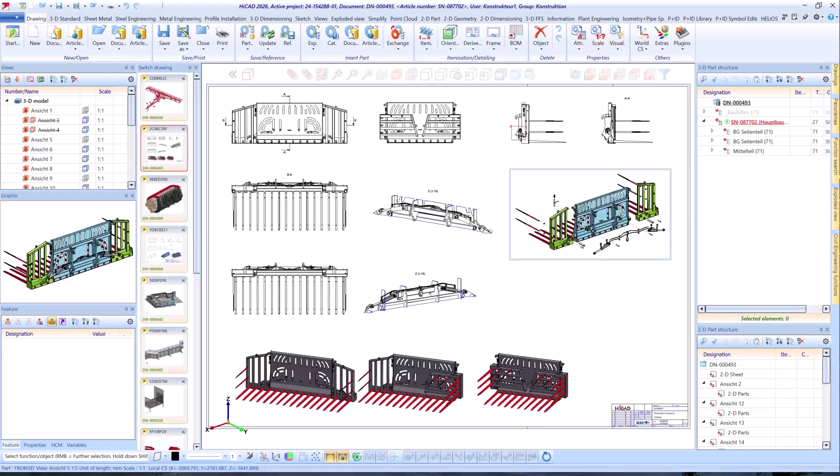In this video, I will show you the new features for drawing detailing. Working with large assemblies often requires reducing the view to fewer parts. However, constantly showing and hiding parts takes time and effort.

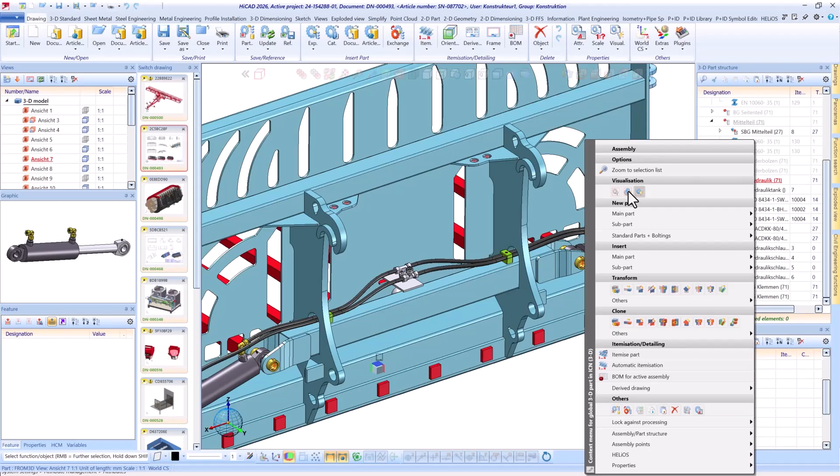The solution can be found in the context menu of the view, where you can easily save the current parts list. Briefly show an assembly and then immediately return to the saved ideal state. You can overwrite this state as often as you like or forget it if no longer necessary.

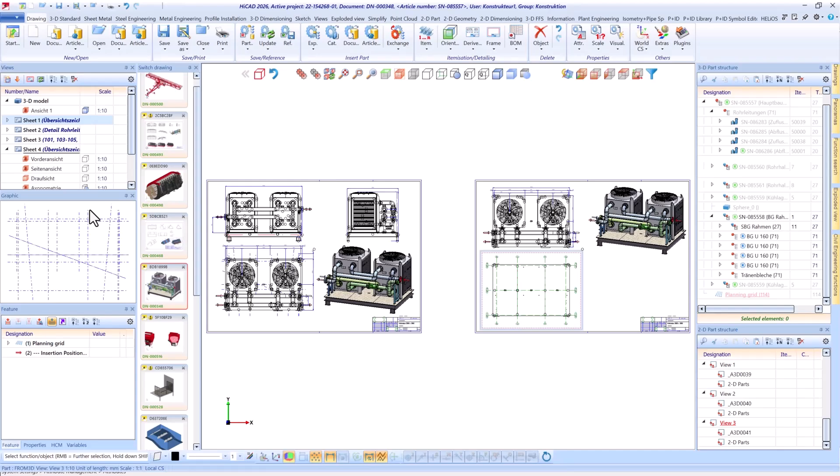A real highlight in HiCAD 2026 is the new duplicate function for drawing sheets. This function is now available via the context menu of the drawing sheet. The entire sheet is copied, including all views, dimensions, and texts. The section and detail identifiers are of course retained in full.

The advantage for you is that you can now create customer drawings, test plans and variants very rapidly, saving hours of work. You are probably familiar with the button for updating views. Unfortunately, this previously did not include the developments.

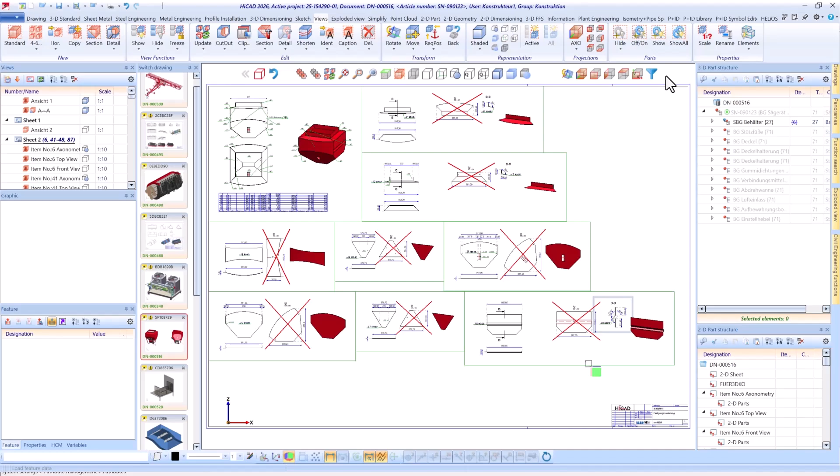With the new design of the button, all view types, including the developments, are now updated centrally. The update function is also available directly in the transparent toolbar. The submenu there also offers the option of recalculating individual developments.

Your standard annotation of bores is now up to date. Previously, it was based on DIN ISO 15786. The new feature is the modern annotation method according to DIN EN ISO 129 with the associated symbols.

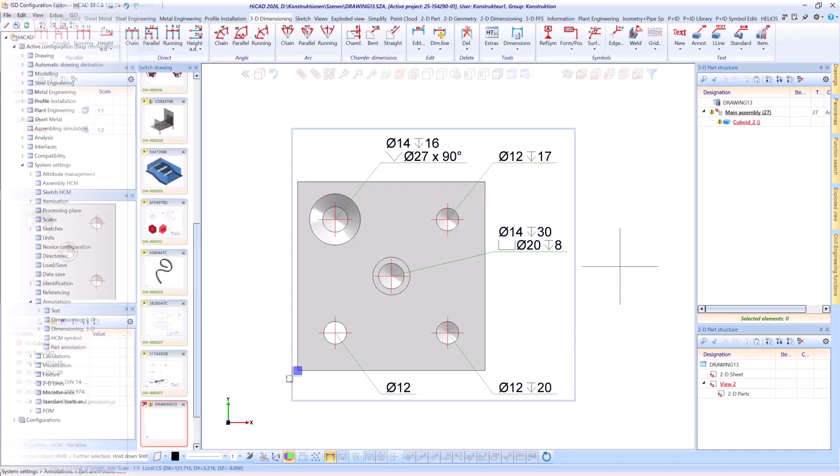Within your drawing, you can change the annotation at any time via the standard annotation settings. The font remains the same. You can use the configuration to define the standard annotations for all new drawings.

The dimensioning and annotation ribbon offers a wealth of objects to place. Previously, you had to start the exact right function to remove them. The universal delete function has simplified this process dramatically. Simply start the function and select any object you want to delete.

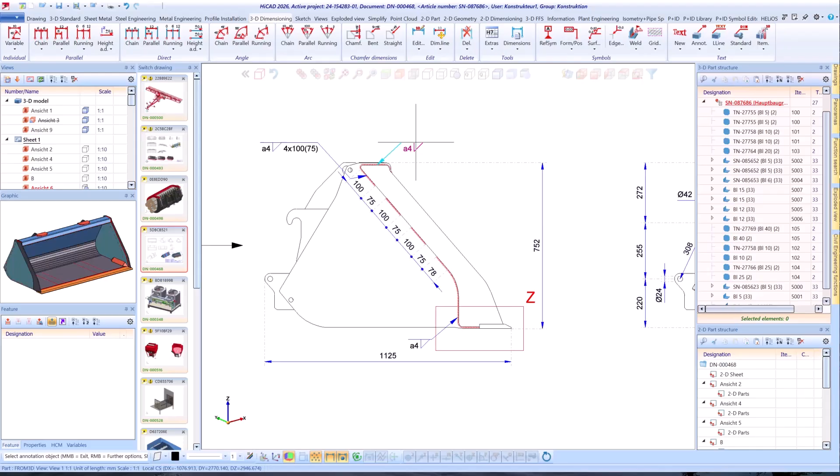Use the Shift key to delete entire dimension structures. The Control key allows you to delete within a rectangle as usual. Right-click to gain access to other useful modes.

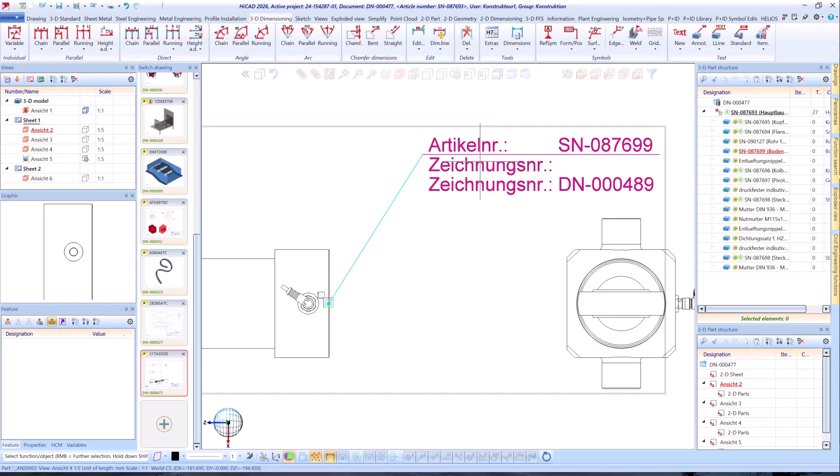Previously, a part had to be referenced externally in order to display the document number of the HiCAD drawing via a virtual attribute. With the new version, you can display the document number even without referencing. You also receive the document numbers for P+ID, isometric drawings, and pipe spool drawings.

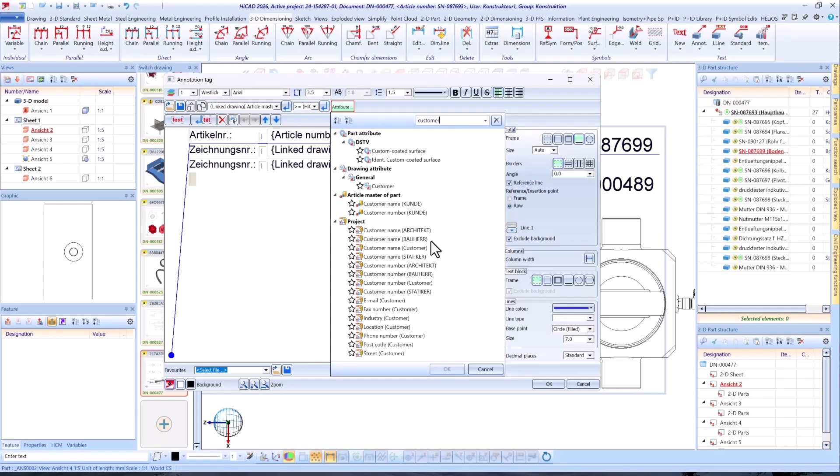The text editor also lists the reference attributes, customer, and material, with their sub-attributes, such as the customer name in this example. The form and positional tolerances as well as the surface symbols have been significantly modified.

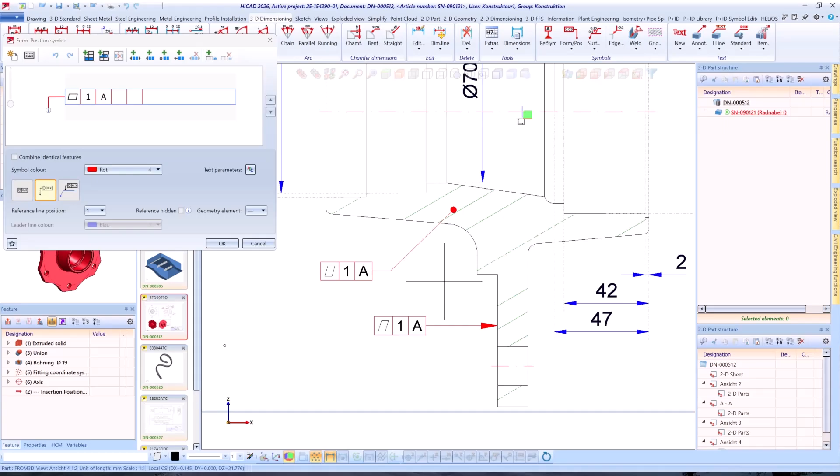Firstly, you can activate an automatic function in the configuration that intelligently determines the end of the leader line. If you click on a surface, the end will be a point. If you click on an edge, the end will be an arrow. In both cases, the result is always filled, that is, not hidden. When you edit the placed symbol, you can also edit the additional leader line at the same time.

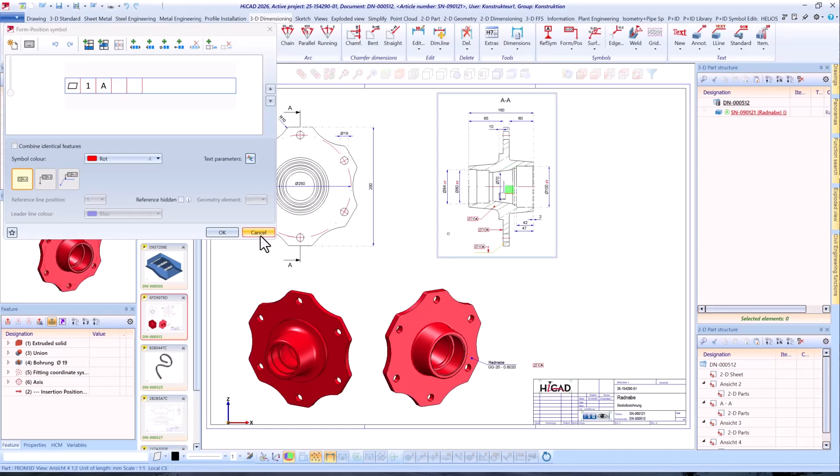Secondly, you can now place form and positional tolerances as well as surface symbols without any reference or leader line. Place the symbol freely in the drawing. This is also ideal for placing additional information near the title block.

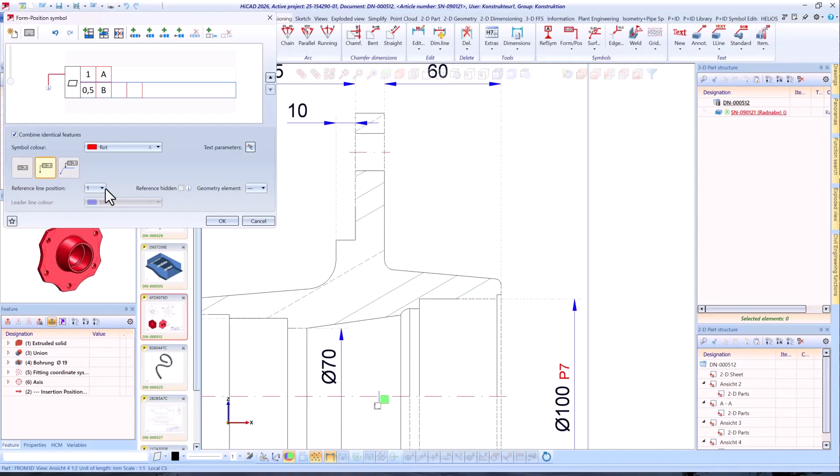Finally, in the Form and Positional Tolerance dialog window, you can combine identical, consecutive features for a clearer and more concise display. This is shown in both the preview and in the drawing.